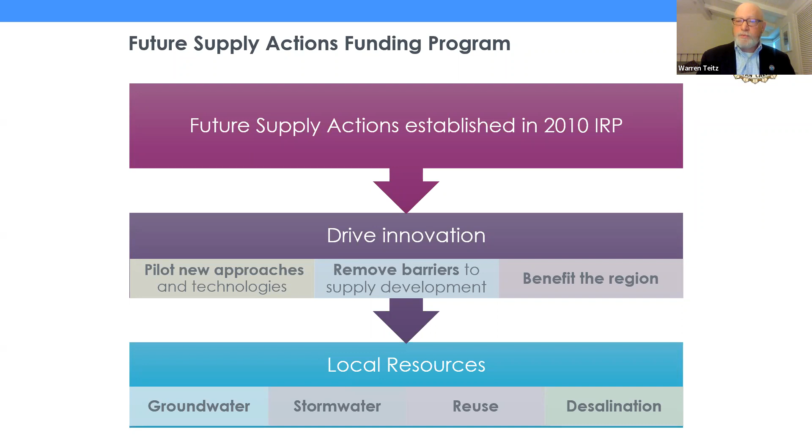Our current program includes 14 studies that we've partnered with our member agencies, totaling just over $3 million, and they cover all 4 of the resources. The presentations we're going to hear today both cover potable reuse. We also have 7 studies co-funded with the Water Research Foundation, including 6 potable reuse studies and 1 agricultural reuse study, just under $1 million. So the total program is about $4 million.

So I think we can go to the next slide, please. Our first presentation is from the folks from OCWD. They partnered with the City of Fullerton. Our first presenter is Dr. Megan Plumlee, the research director for the Orange County Water District. Joining her would be Dr. Julio Polanco, a postdoctoral research associate also with the Orange County Water District. At this point, Megan, I'll turn it over to you.

Thank you so much, Warren. Hopefully everybody can hear me and I got my camera on. All right, so the title of our presentation today is Demonstrating Virus Log Removal in Potable Reuse to Increase Regulatory Confidence. Hold on, let me minimize my thumbnail there. I can't see my own slides. Okay, there we go.

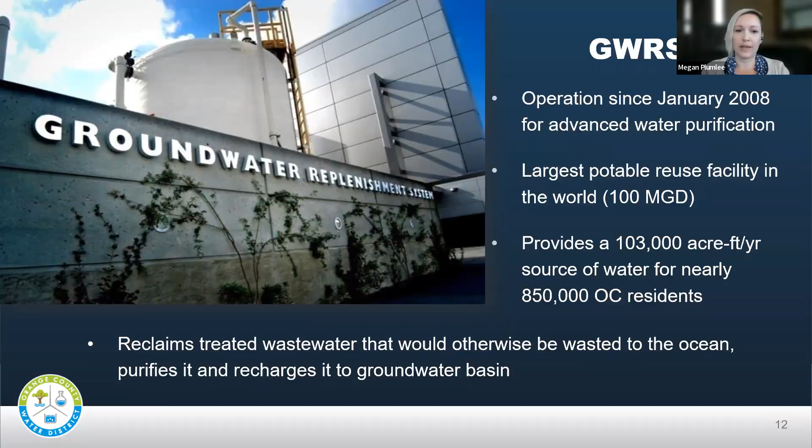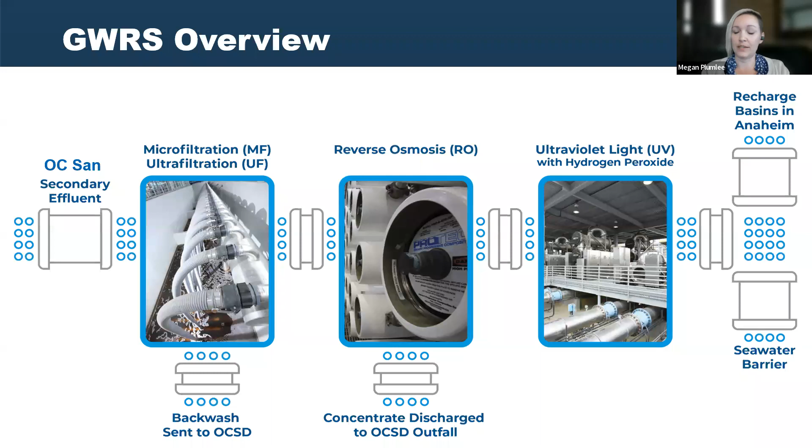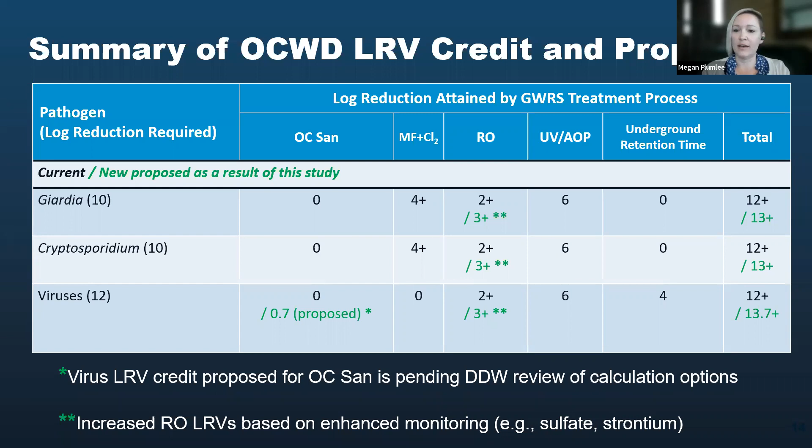So the green numbers show the outcomes of our study we're presenting today. Based on the results of this study, we're proposing to our regulator, Division of Drinking Water, a 0.7 log for the OC-SAN treatment process for virus, and then an extra log for the RO process. Both of these are being currently reviewed by DDW as part of our Title 22 engineering report for the final expansion of the plant. So still under review, but this is what we're proposing based on the study today.

So with that, I will turn it over to Julio, and he's going to present an overview of the results from our OC-SAN virus LRV study.

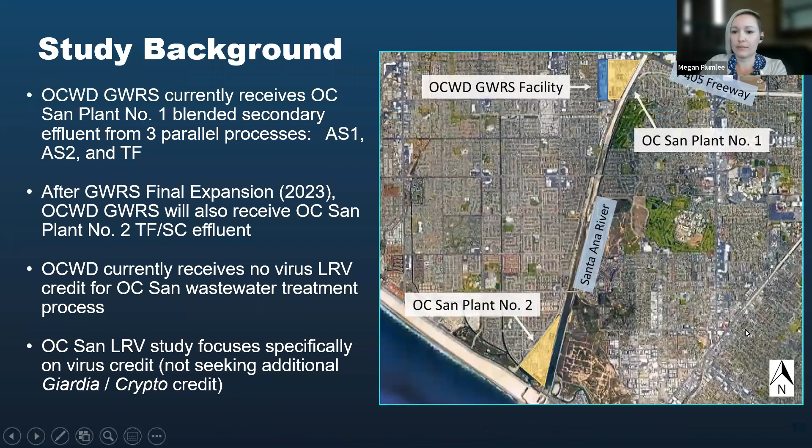As Megan mentioned previously, the Orange County Water District's groundwater replenishment system currently receives a blend of 3 parallel treatment processes from the Orange County Sanitation Plant number 1. These 3 parallel processes include 2 activated sludge processes, AS1 and AS2, and 1 trickling filter process.

The trickling filter process is a simple aerobic wastewater treatment process that removes organic material from the influent wastewater stream. The activated sludge processes are basically a nitrifying, denitrifying, partially denitrifying process that is more efficient at removing this organic material as well as some suspended solids.

So after the GWRS final expansion, which is scheduled to complete in 2023, the GWRS will also be receiving a 4th secondary effluent supply of water that is from the Orange County Sanitation District Plant number 2. That is about 4 miles south of the current GWRS facility, shown on the map right there.

This treatment process is a trickling filter trickling filter solids contactor, which is essentially very similar to the Plant 1 trickling filter, except it has an added step that allows it to remove an additional amount of suspended solids and has improved organic material removal.

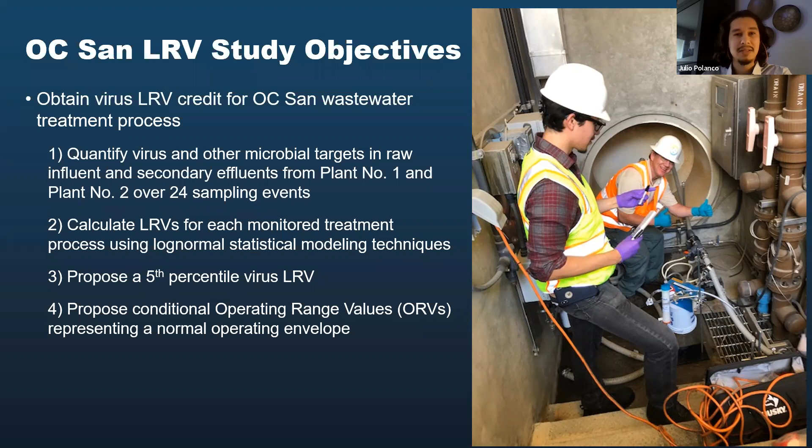Throughout this study, we monitored these viruses using a few standardized methods, including EPA 1615, for both the infectivity culture assay and the molecular assay. I'll refer to the infectivity culture assay as the cultivable virus data set going forward. For the molecular data set, we used droplet digital PCR as opposed to qPCR, which is within the modified 1615. We also used EPA 1602 to enumerate male-specific and somatic coliphage by cultivation methods, and standard methods 9222B and D to enumerate total coliform and fecal coliform.

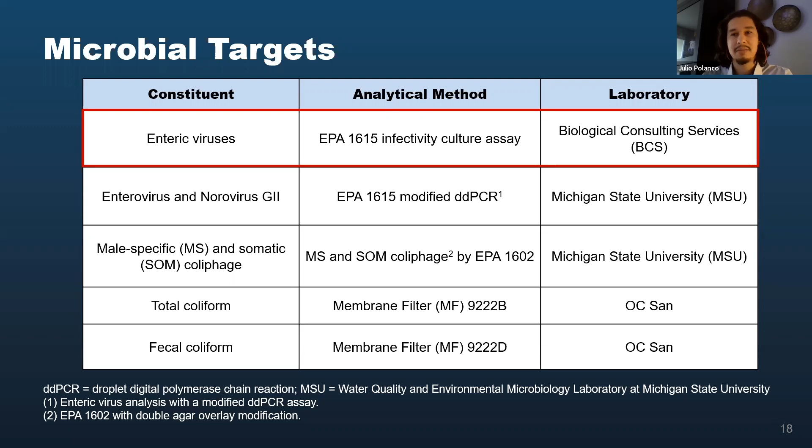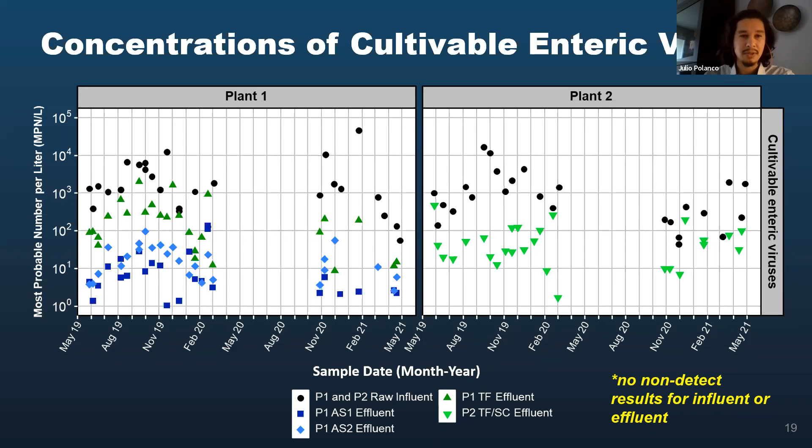One thing I wanted to mention is that we didn't observe any non-detect measurements for either the influent or the effluent, which is great because there are no substitutions going on. What's most important about this plot is that on every given day we sampled, the treatment processes show log reduction or removal of these viruses. Next slide, please.

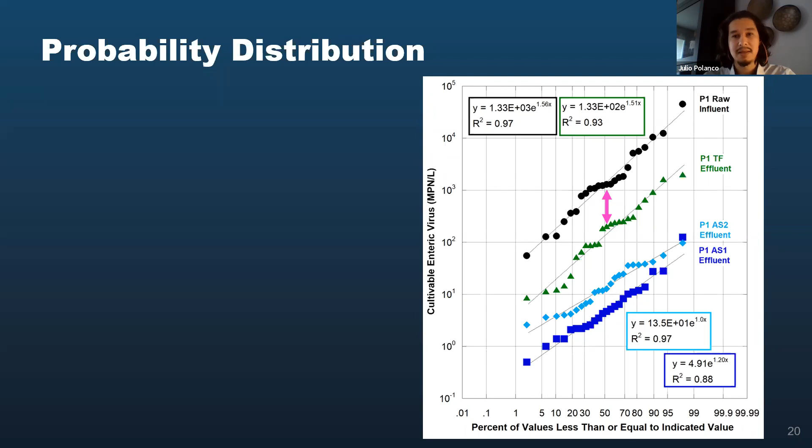Considering this visual representation of the removal of these viruses, how do we quantify it? We considered three different approaches for calculating log removal for each treatment process. The first approach was same-day pairing, which assumes the same water parcel is sampled from influent to effluent. Due to the complexities of residence times that vary between each treatment process, it's difficult to get an accurate estimate, and this is largely not valid, so we pushed this approach aside.

The second approach was the Monte Carlo approach, essentially a computer simulation that is an iterative log removal estimation based on influent and effluent statistical parameters. This means the two distributions in question, for example a raw influent data set and an effluent data set, are assumed to be independent. The third approach was a covariance approach, a parametric evaluation of influent and effluent distributions that tests the variance of two dependent populations. Based on review from our GWRS IAP independent advisory panel, it was recommended that we proceed with the covariance approach based on the quality of the data set.

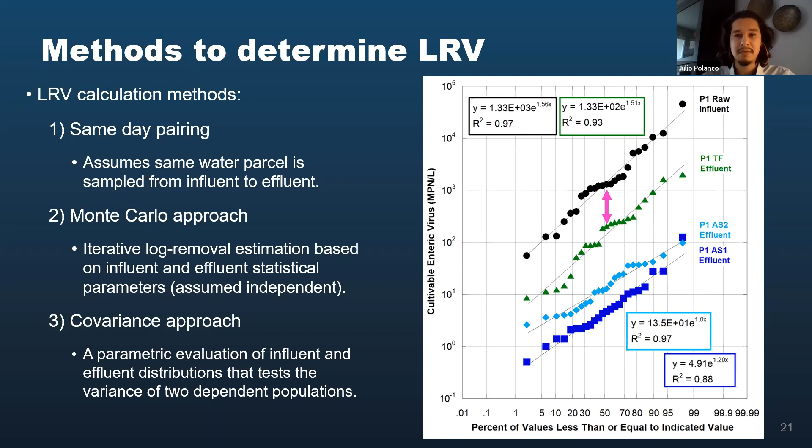The covariance approach was recommended since it assumes and tests the correlation between the log influent and log effluent values.

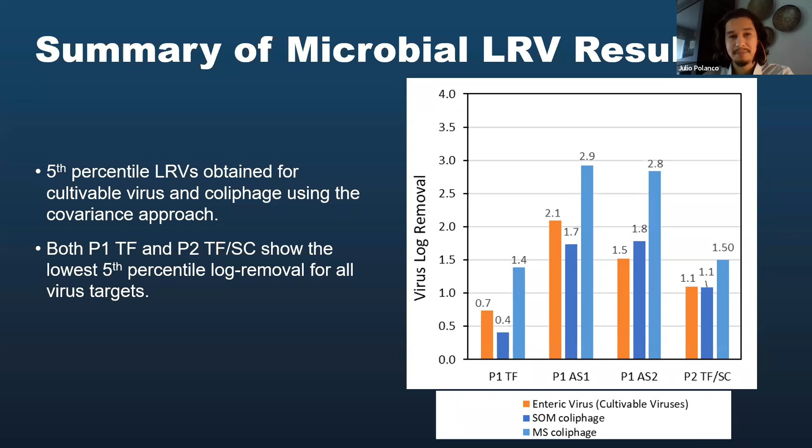To summarize the findings of this study, the covariance approach for determining virus log removal value credit was recommended by the GWRS Independent Advisory Panel. Due to the complexity of calculating a combined or amalgamated estimate of removal for all Orange County Sanitation District treatment processes, the 5th percentile value of the least effective treatment process, the plant 1 trickling filter, was chosen as a proposed credit value to represent a conservative value for all of the plant 1 and plant 2 processes.

This proposal is pending DDW review of the LRV calculation options. Currently, OCWD is proposing a log removal value for virus of 0.7 log, in addition to conditional operating range values for the plant 1 trickling filter, in the Title 22 engineering report.

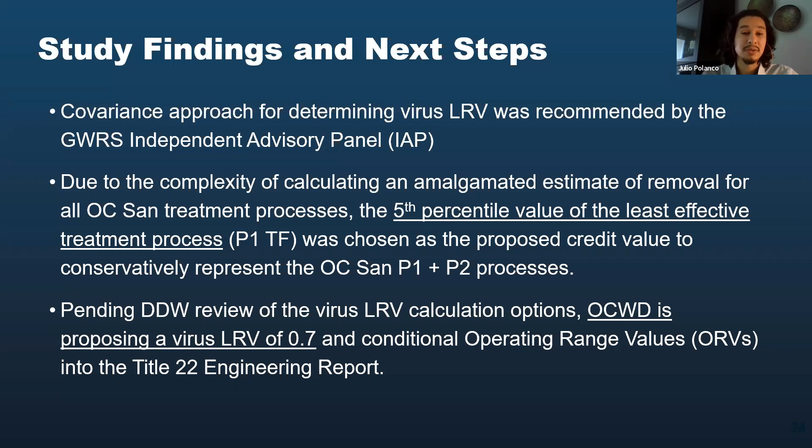All right, thanks, Julio. Okay, so for this portion of the study, let me minimize myself so I can actually see my slides.

There we go. For this portion of the study, focused on the RO process, quick reminder of the background: we currently achieve about 2 logs of virus log removal credit across RO, granted based on TOC, or total organic carbon, online monitoring. We have monitors on the RO feed and monitors on the RO permeate, and we simply calculate the daily average TOC percent removal, around 99%, or 2 logs, applied as the credit obtained that day for virus removal.

The objective of this study was to identify alternative constituents that could be easily monitored, either via online monitoring or grab sampling, that would show a higher log removal value than the TOC value of around 2. I should mention we also monitor electrical conductivity as a backup to TOC, which achieves around 1.5 logs removal.

We wanted to do this over multiple months to make sure we demonstrated values representative over time in different seasons, and we wanted to do this at full scale, utilizing one of the full scale RO units within the facility. That's a photograph there. Each of those distinct sections of white pressure vessels is a 5 MGD RO unit, and we currently have 21 of those in the facility.

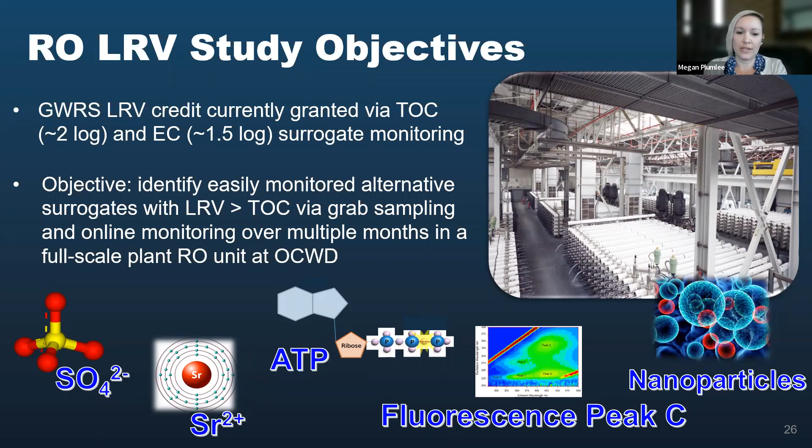For the other 4, we did see promising results in every case. This is a summary of our findings for the different constituents. Strontium showed the highest study average log removal value across RO, with a value above 3. Sulfate and free ATP were close to 3, also significantly greater than the TOC and electrical conductivity we monitored in the same full-scale RO unit at the same time. Fluorescence peak C showed the lowest log removal average value, but still a fair bit greater than TOC.

Strontium and sulfate were all measured via grab sampling. However, since we completed this study, online instrumentation has become available, and we're considering use of those. The free ATP and fluorescence peak C already have continuous or online monitors available, so that's what we used to collect the data for this study.

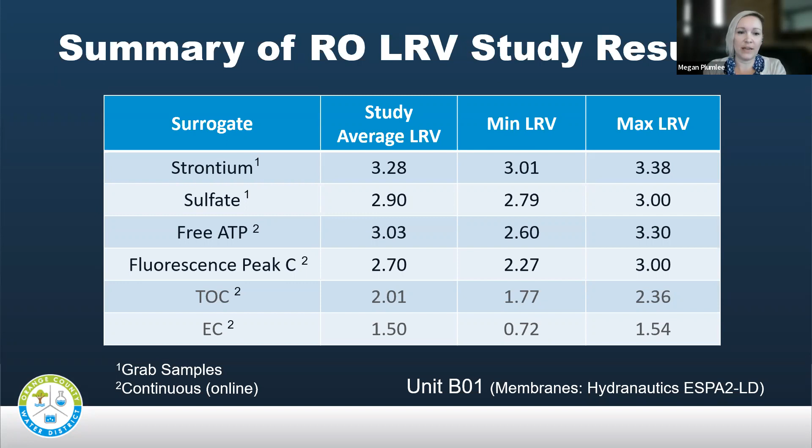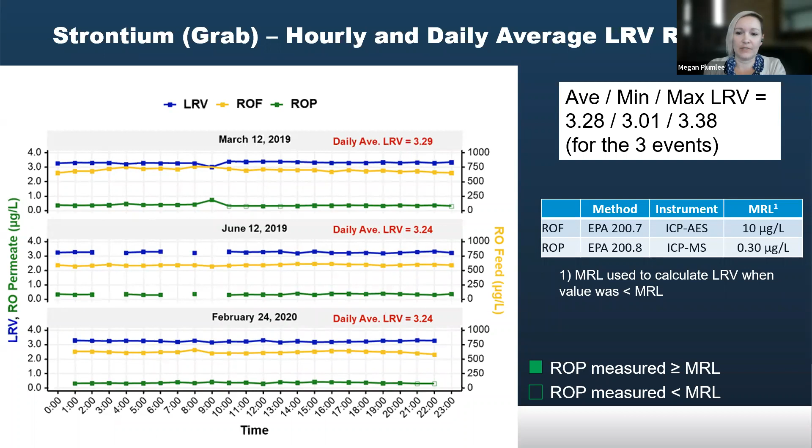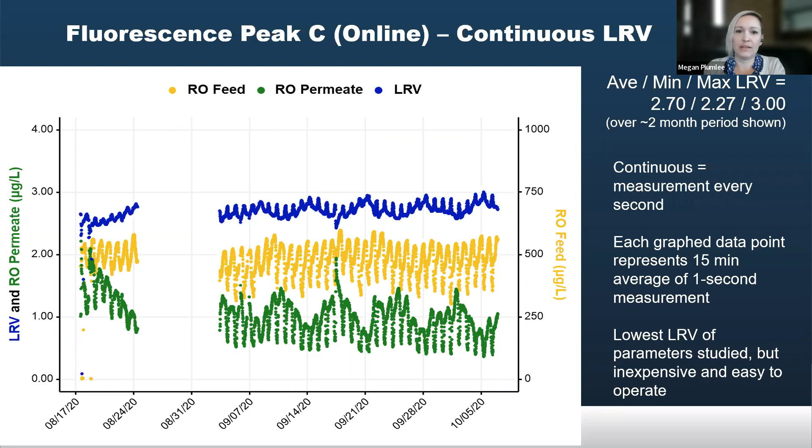So by far it was the easiest online constituent to measure and demonstrate log removal value, even less finicky than a TOC monitor for sure. So I think for a facility interested in perhaps a new facility coming online, interested in demonstrating integrity but not wanting the expense or complexity of online strontium, sulfate, or ATP, which are more costly, this could be a candidate to pay attention to.

So findings overall, we really saw that these novel online methods are becoming more feasible to enhance RO-LRV credit based directly on this project outcome.

OCWD is moving ahead, working with our regulator to propose a tiered framework. We couldn't pick just one, so we created a tiered framework based on strontium, sulfate, and ATP to be monitored in our facility as alternatives for demonstrating RO integrity related to our engineering report for expanding our facility and the permit there. We would still keep TOC and electrical conductivity monitoring as backup, because these provide other water quality monitoring value.

So it's really exciting to see how the findings from this study, not only for the RO portion here but also the wastewater portion that Julio presented, immediately translate into a direct application for our facility. And just want to note that though we are an indirect potable reuse facility, these findings are equally applicable to direct potable reuse facilities that will be required to demonstrate even higher pathogen log removal values.

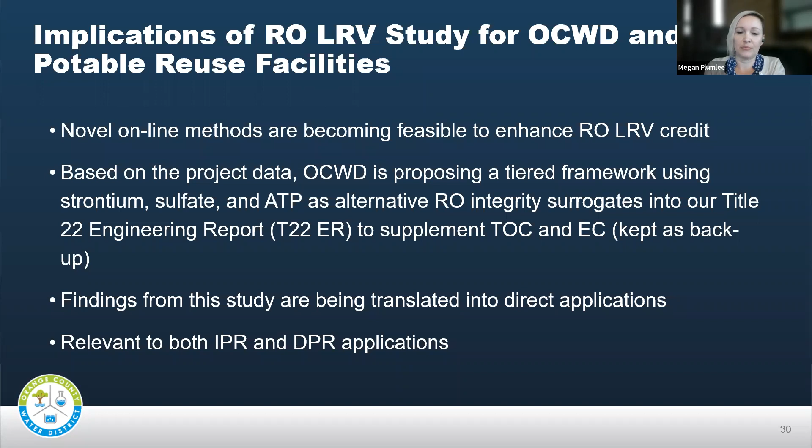So with that, if we have time, there may be some time for questions, or we'll move to the next presentation. Great, Julio, Megan, great presentations.

We have time for one question, and we actually have one question, so I think we'll answer this one live. This is from an anonymous attendee, and I think, Julio, this is directed for you. What would you estimate as the ballpark sampling cost for the wastewater treatment plant LRV study? So for basically the first part of the presentation.

It's a good question. It can get pretty expensive very quickly. For our study, we have some pretty large invoices, especially because we considered using molecular approaches. But on average, I would say we looked at about $500 cost per sample for the enteric virus analysis, the cultivable assay. If you're looking at a 24 sampling event for one treatment process, that translates to about $12,000 to do that assessment.

And regarding the coliphage and coliform, we were lucky enough to have the Orange County Sanitation District help us out with that, but we have about $100 cost for coliphage analysis for both targets.

I can jump in and add, we were just trying to put these costs together for a new Water Research Foundation project that's developing guidance for demonstrating pathogen LRVs across wastewater treatment plants. So I encourage you all to watch out for that one. The PI is Professor Verbyla, but I don't recall the number of the project. I believe he's pulling together costs from multiple projects, including ours, and the average is something like $200,000 to $300,000 in total to do a pathogen LRV study across. But I think that's including Giardia and crypto as well, whereas we just did the virus. So that's kind of a ballpark number.

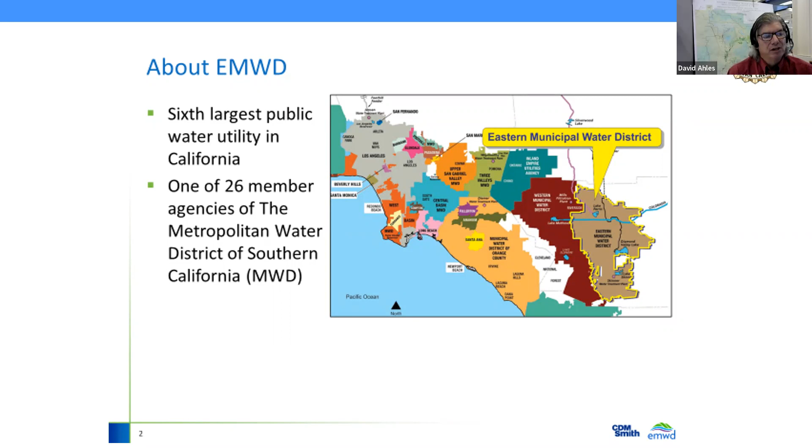Drive it. Okay, the name of our study was the EMWD Brine Minimization Pilot Study. And so what we did was we utilized CCRO, closed circuit reverse osmosis, to try to maximize recovery. But first, I'm going to talk a little bit about Eastern. Again, we are one of the member agencies of Metropolitan Water District. We cover the area from Moreno Valley down to the Temecula Valley, so the Inland Empire district, and we are the 6th largest utility in California.

We were established in 1950. We're full service: we do water, wastewater, and recycled water, both wholesale and retail.

Our population's growing quickly. We're at a little bit over 839,000, and our service area is large at 555 square miles. Really important is we're only 38% built out, so we have a lot of growth potential within our district.

Like everybody, we're trying to diversify our supply portfolio. So 30 years ago, you can see on the left, the majority of our water was imported from Metropolitan, both through the State Water Project and the Colorado River Aqueduct. We're fortunate we have a large potable water aquifer that supplies drinking water, and that was about 18% 30 years ago.

We've had a recycled water program for a long time. Moving to today, we pump less potable groundwater as a percentage, but we've instituted a new program pumping the brackish basins. On the west side of the district, the groundwater aquifers are brackish, so we have about 8 million gallons a day in desalter capacity, and those desalter plants are hooked up to the inland brine line. We continue to expand our recycled water program to the point where, on average, all the wastewater is treated to Title 22 standards, disinfected, and then used for non-potable sources.

The district has created a program called Groundwater Reliability Plus, and it has 7 sub-projects to it. Today I'm just going to talk about the top 3 shown here, and these are groundwater recharge projects.

The first one, groundwater sustainability, is our current groundwater recharge that we do with imported water from the State via Metropolitan. We have an agreement with both Met and the Soboba Indian tribe to recharge on average 7,500 acre feet a year, and we do that in existing recharge basins in the San Jacinto River.

The middle project is our water banking. This is a new initiative where we'll bring in more imported water and increase the amount of recharge that we do. We just finished construction on what we call Mountain Avenue West Recharge Basin, a basin with a capacity infiltration rate of about 30,000 acre feet a year, so we'll be bringing in more imported water.

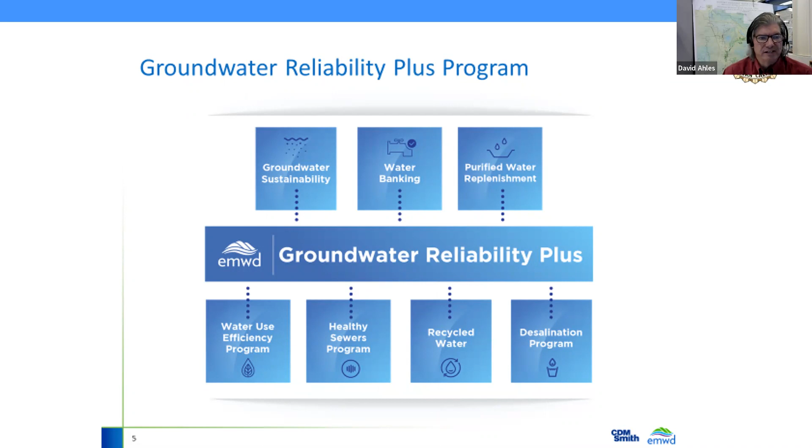We're currently working with Met for a new connection and a new 60-inch pipeline to bring in additional recharge water, up to 14,000 acre feet a year. On the right is our indirect potable project, or groundwater augmentation project, which we're titling the Purified Water Replenishment Project. This is a new potable reuse project that will take the treated wastewater and recharge it into the San Jacinto Upper Pressure Zone basin.

A little more detail on our groundwater augmentation project: all the flow comes from our San Jacinto Regional Water Reclamation Facility. We'll start with the disinfected tertiary water, which will have two streams. The main stream will come through an MF-RO system, and then it will be sent out to the recharge pond.

The reason for this treatment is the groundwater basin has a maximum benefit objective. To comply with the basin plan, our recycled water is currently about 600 TDS, and the maximum benefit objective is 500 TDS, while the current water in the aquifer is probably around 400 TDS. So we want to recharge water that is higher quality than what's already in the existing groundwater there.

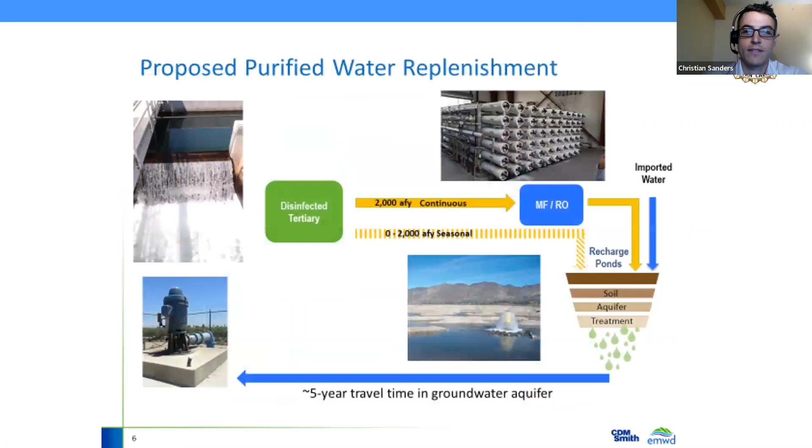Okay, so thank you. We just wanted to start off first with a brief introduction to the pilot. The goal of this pilot was to look at how high a recovery we could achieve with the process, and again, being an inland location, brine disposal is a major cost and project driver for this project.

The preliminary design was done a few years ago by CDM Smith. A traditional 3-stage RO was proposed at the time based on 92.8% recovery, and the objective of this pilot was to look and see whether or not we could push that recovery up a little bit higher using the CCRO process.

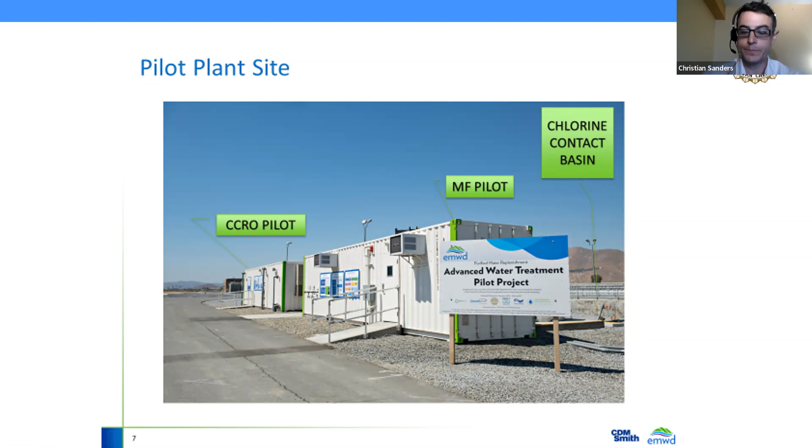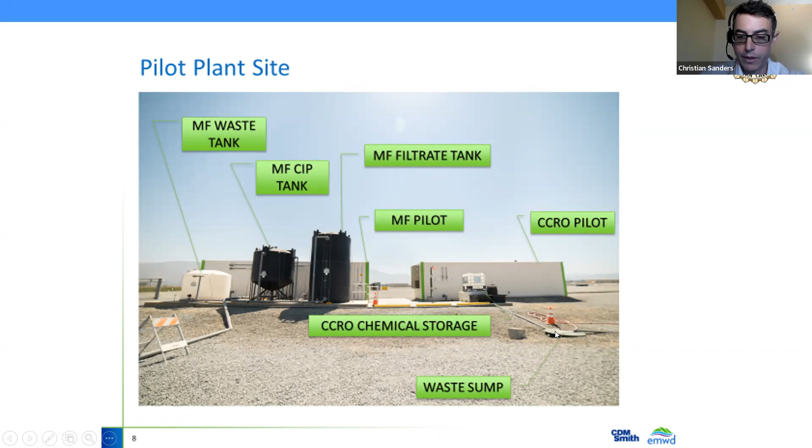Another photo for the backside - we've got our CCRO pilot here on the right-hand side and the MF pilot on the left. This MF filtrate tank was our balance tank between the two pilots. We produced filtrate, which was used for backwash in the MF and was the feed water supply for the CCRO. The CCRO's chemicals were located outdoors, but the MF's chemicals were located inside the trailer. All the product water we produced, the brine and everything else, was returned back to the chlorine contact basins via this waste sump here.

A quick schematic for those on the webinar not familiar with CCRO: it looks similar to RO, but the main difference is this circulation pump and the brine flush valve. During the closed circuit cycle, we're producing permeate as a normal RO, but we're also recirculating brine, and in that process the recovery is slowly increasing over time during the closed circuit cycle.

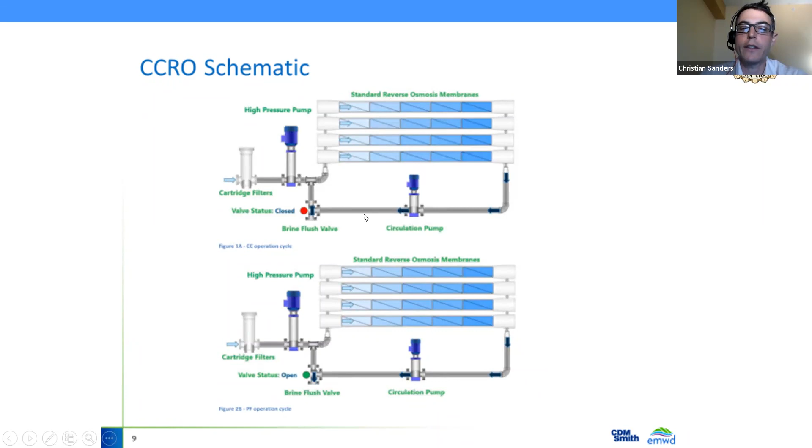Once you hit your recovery value - in this case we started the pilot study at 90% and were trying to push it up to as high as 95% - when you get to that recovery set point, the brine flush valve opens and the circulation pump sends concentrate to waste. It's during that plug flow cycle that the CCRO functions as a typical RO. During both cycles, the permeate flow remains unchanged; it's the concentrate flow that's either purged during a plug flow cycle or recycled during the closed circuit cycle. That concentration cycle is really unique to CCRO.

In the interest of time, we won't dwell too much on the MF. The study didn't really focus on the MF, but we thought it'd be important to present some of the key design parameters. We used Toray TIPS membranes, 200 micron auto strainers upstream, and we had the ability to dose sodium hypochlorite, liquid ammonium sulfate, and sodium bisulfite, varying those depending on changes in feed water quality.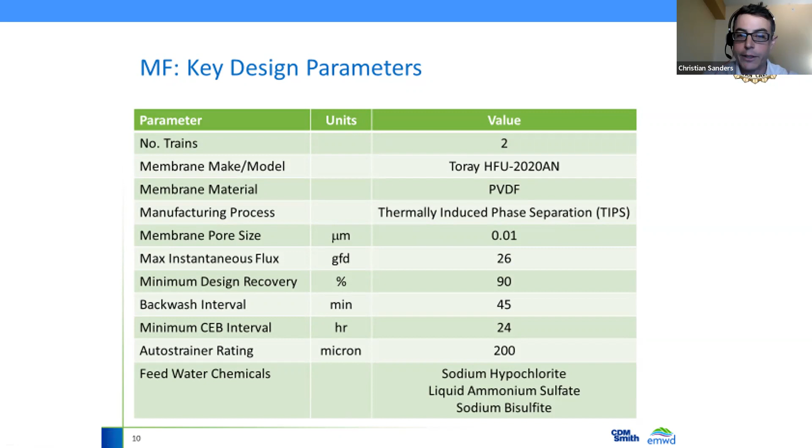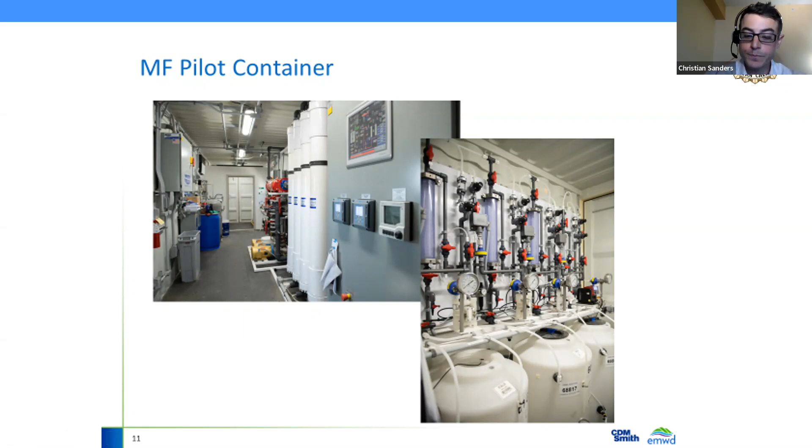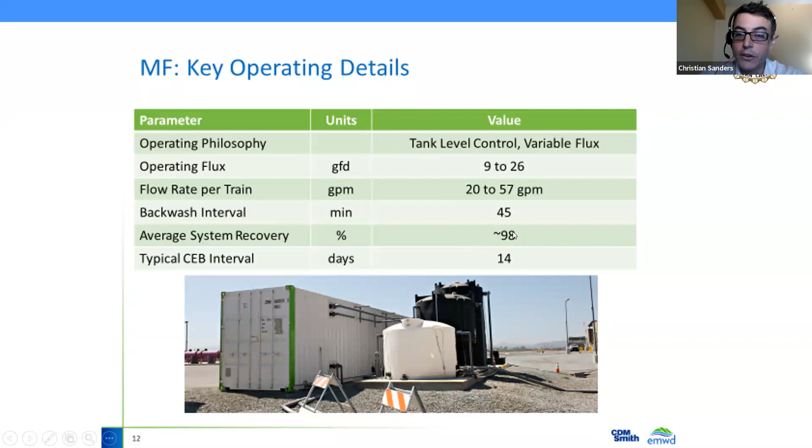So we started with a backwash interval of 45 minutes. We didn't change it at all throughout the pilot study, which was about 7 months long. On average, we were doing a chemical enhanced backwash approximately every 14 days, which is quite a lot of time between chemical enhanced backwashes. We started off with about 1 week in between, and we found we were getting very little decrease in permeability, so we stretched it out to 14 days, and in general this was sufficient. As you can see, that resulted in an overall system recovery for this process of about 98%.

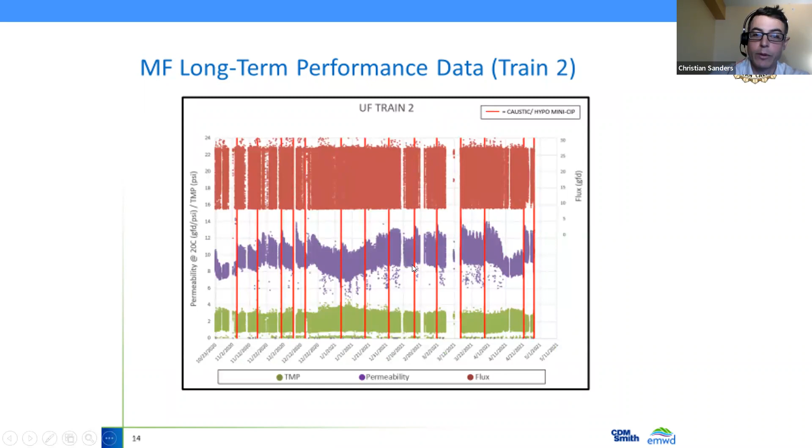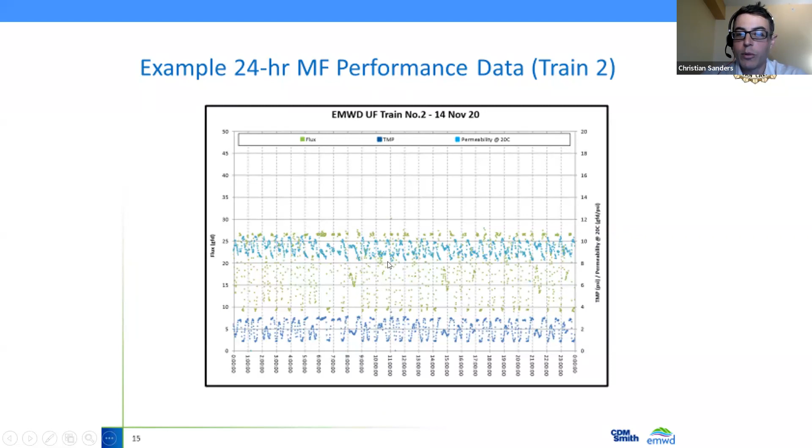Just to show what we talk about when we say stable performance - this turquoise line here is our permeability. Very little change from start to finish over a 24-hour period, and this would go on for days. TMP roughly between 1 and 3 PSI, more or less, on average over a 24-hour period. Our green dots here are the flux. Again, because it's variable, it's a little scatter shot on the screen.

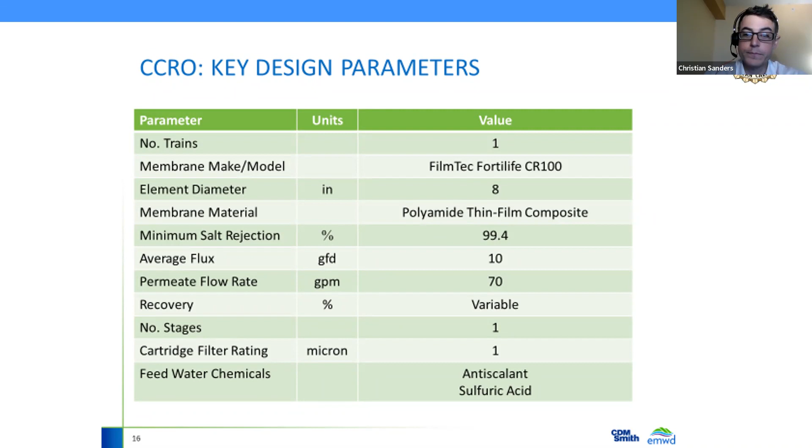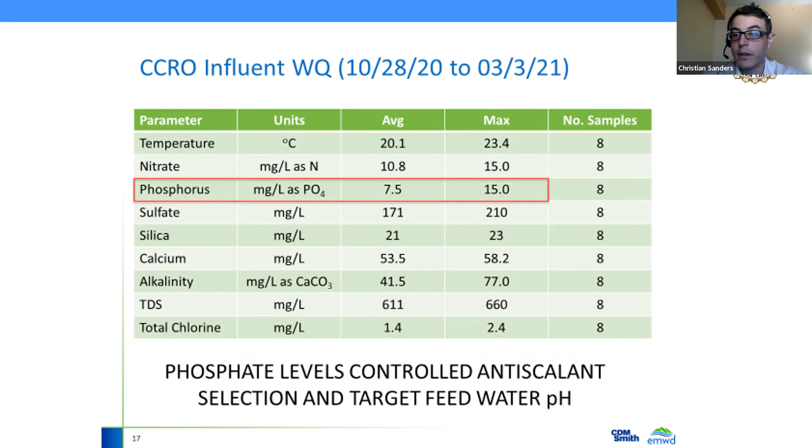Some of our water quality constituents - we've got a red box around our phosphorus because that was the driver behind our anti-scalant selection and dose rate. This is also the driver behind our pH set point, calcium phosphate scale being the main concern we had.

We did start with an Avista product. Ultimately, about halfway through the pilot study, we went to AWC. We found that their projection software was more robust for CCRO. It's the only one that we're aware of that actually has a CCRO specific functionality to their projections. We were also able to do bench testing at their labs in Florida to confirm the findings from the projection software. It just gave us a lot more confidence in what we were using.

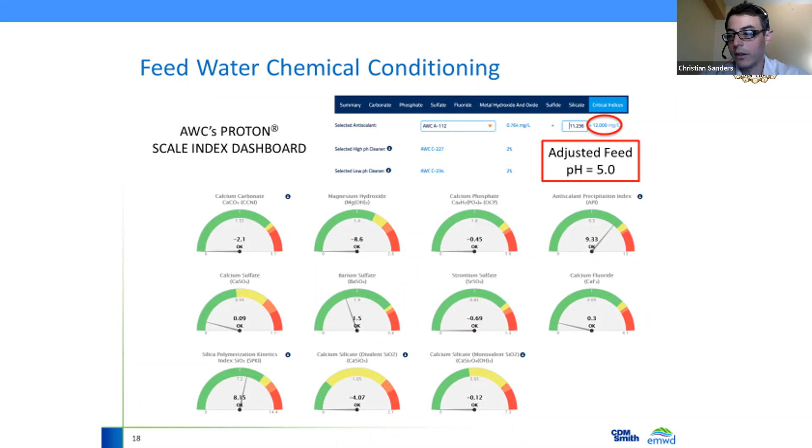So we settled on a dose of 12 milligrams per liter and a pH of 5 based on those worst case conditions. We only identified the worst case condition at the start of the pilot, but again, we were really concerned about having some uncontrolled scaling occur. So we based all of our chemical dosing set points on worst case to make sure that any fouling that was happening was simply reversible fouling and not irreversible.

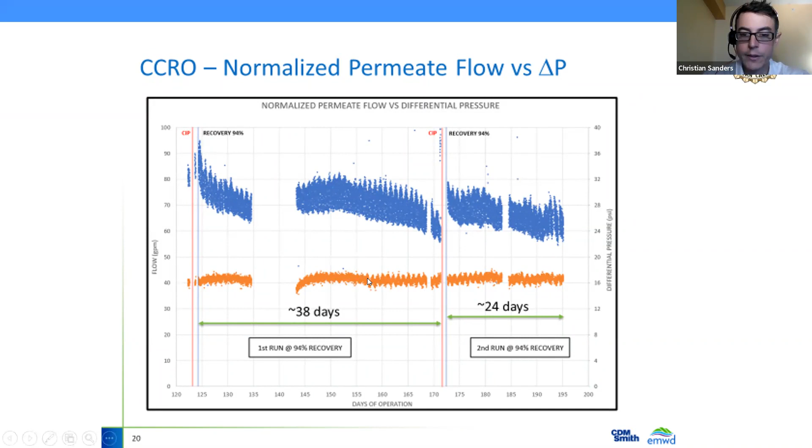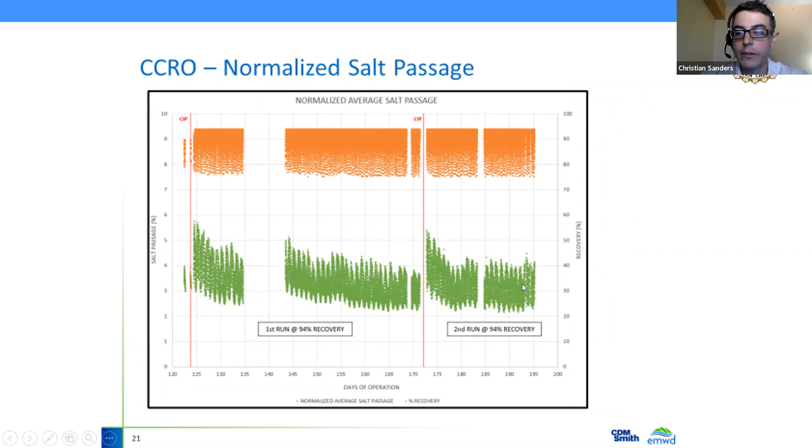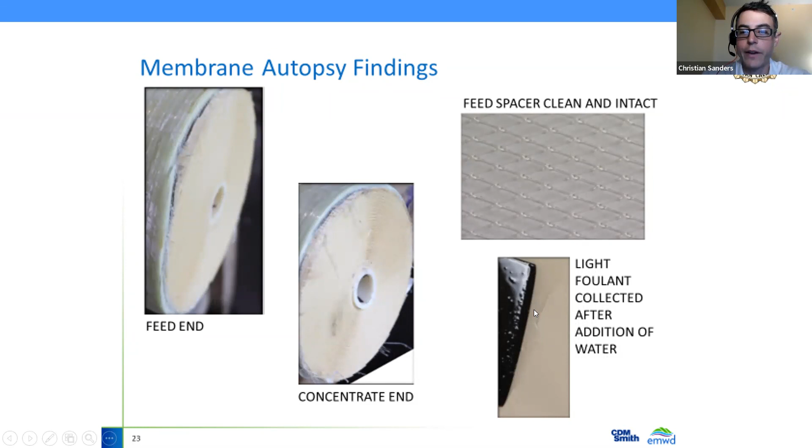They did find a light foulant. I'll go back to that slide here. So their conclusion, everything was looking very visually good upon arrival. It didn't weigh very much compared to a brand new membrane, so it hadn't accumulated a lot of material.

When they went to do their standard CIP procedures, which typically they perform a generic CIP and then they start to get into more specialty cleans to figure out what's the foulant, what they found was just soaking a coupon in deionized water in preparation for the CIP, they got a 20% boost in permeability over the membrane's nominal specification. They then got another fairly significant increase in the permeability after just doing a generic high pH clean. They then did the typical acid clean after that. There was a slight change, but not too drastic in that permeability.

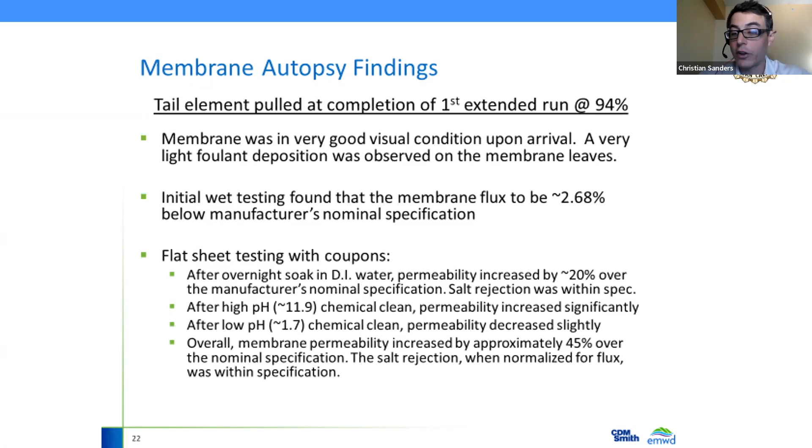Overall, there had been an increase in what they calculated approximately 45% increase over the membrane's nominal specification, which was very interesting. They looked at salt rejection as well, and when they normalized that for flux, it was within specification.

So that large increase in permeability was not associated with oxidative damage, and because the Fujiwara test came back negative, and the salt rejection, as I noted, was within the specification, they didn't find any evidence of inorganic fouling, which is what we were mainly concerned about, especially with the risk of calcium phosphate scaling occurring here.

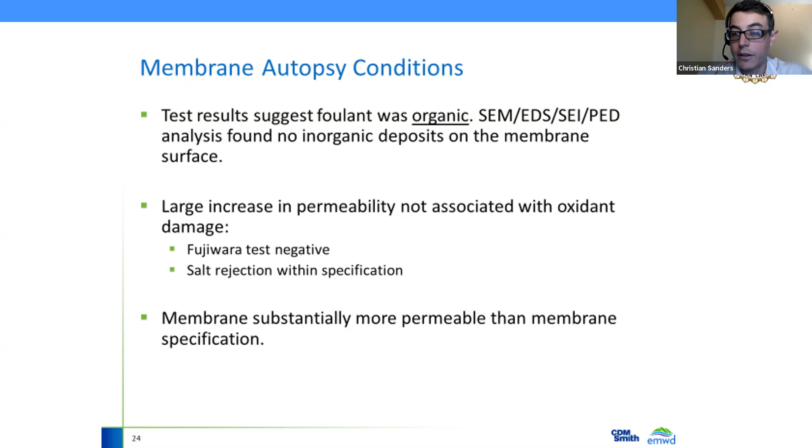And so the foulant actually was determined to be organic in nature. They didn't provide much more information beyond that, but that simply was the only thing that could really be understood by the autopsy results. They did conclude that the membrane was substantially more permeable than the membrane specification, which was simply an interesting fact that they uncovered. They did tell me that they've identified that from time to time, and the end conclusion was that we simply had something organic that we needed to focus on for the future.

Now, we didn't get these results back until the end of our pilot study, so we really haven't had any ability to take any action on these results. It's simply information that came back at the end.

So we did perform a cost analysis to look at what would a CCRO facility cost versus a conventional 3-stage for this pure water replenishment project, which is initially going to produce 2,000 acre feet per year based on 90% availability. The preliminary design that CDM Smith completed in 2018 assumed an average flux for the system of 12 GFD and a brine flow of 108 GPM.

So if we could bring the recovery up to 94% with CCRO, we could bring the brine flow down to 89 GPM, and a 20% reduction in brine flow is fairly significant on a project like this.

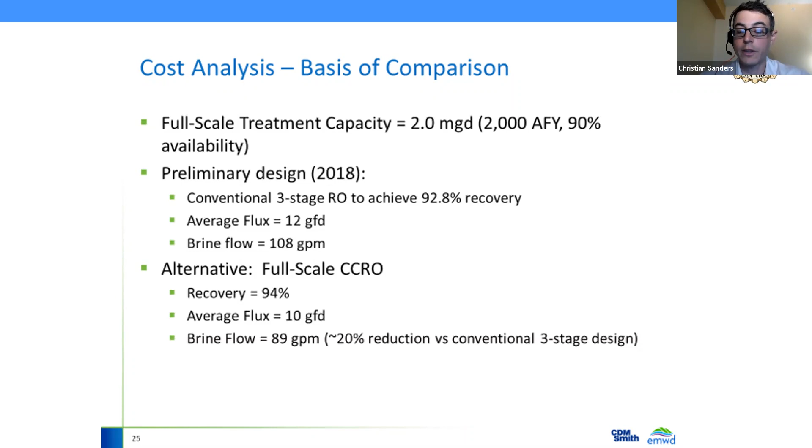So some of the things we assumed when we did this basic cost analysis: we were only going to look at the CCRO and 3-stage RO equipment, chemical conditioning, and brine ponds. We were going to assume that all other project components were identical, and that labor costs were going to be equal. For the operating costs, we included power, chemicals, membrane replacements based on a 5-year average membrane life, and we assumed a flat 2% of equipment cost for maintenance.

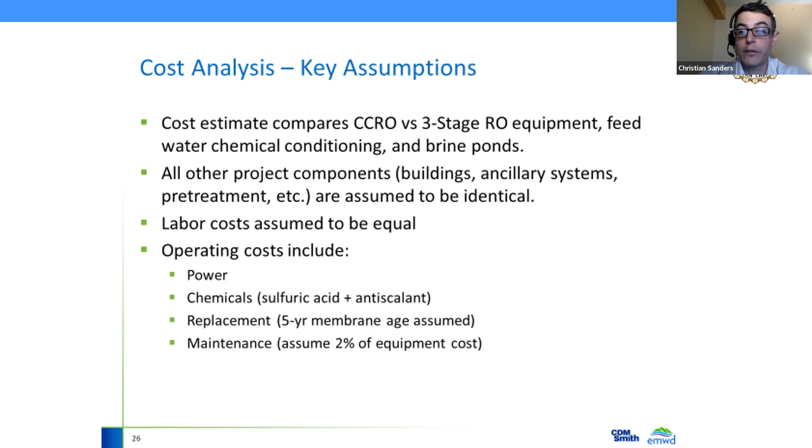Now for that CapEx, we assumed there would be two 2-MGD trains, and that was to have redundancy in the RO for the 3-stage RO option. We costed that at $2.4 million. And for the CCRO, we assumed 3 1-MGD trains.

After talking with Desalitech, they thought the 1-MGD train was the most cost-effective for this project. So we based our assumptions on assuming that there would be 1 redundant 1-MGD train. That came out to a cost of $2.7 million, so a little bit higher than the 3-stage RO.

Now, we did cost the brine ponds in the preliminary designs. That came out to 9.2. So we escalated that to 2021 numbers, assuming 5% escalation, which, as everybody knows in this current environment, may or may not be exactly accurate, but is more or less in the ballpark.

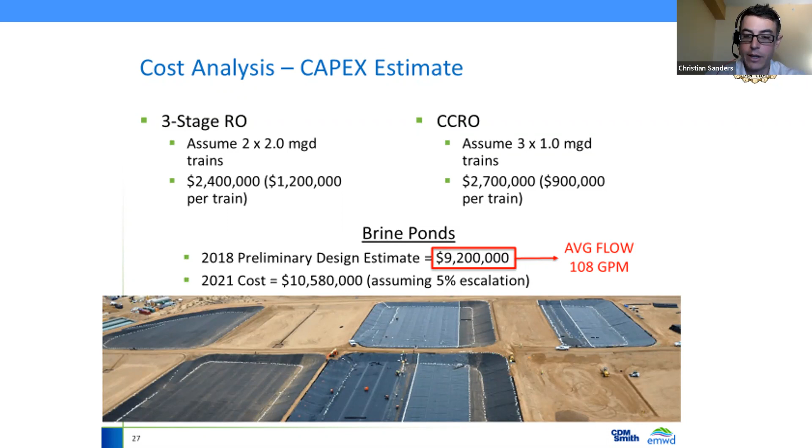We came up with 10.6 million for those ponds. Remember that number of 108 GPM. When we did the NPV estimate for a 30-year NPV, we assumed smaller capital costs for the evaporation ponds related with the CCRO, and we basically just took a proportional reduction. So we used 89 over 108 to come up with the value of 8.7 million for the ponds for a CCRO process.

For annual O&M, again, as I noted, those are based on the chemical and power costs and an average membrane life replacement every 5 years. The cost is considerably higher for the CCRO because we were basing that on the numbers we used during the pilot, which were very conservative. We certainly would expect that number to come down if we were experiencing a degree of optimization and average conditions.

This number came out to be $442 per acre foot for the 3-stage RO and $467 for the CCRO. We definitely would expect it to be less daylight between those two numbers based on a less conservative regime of chemical dosing for the CCRO.

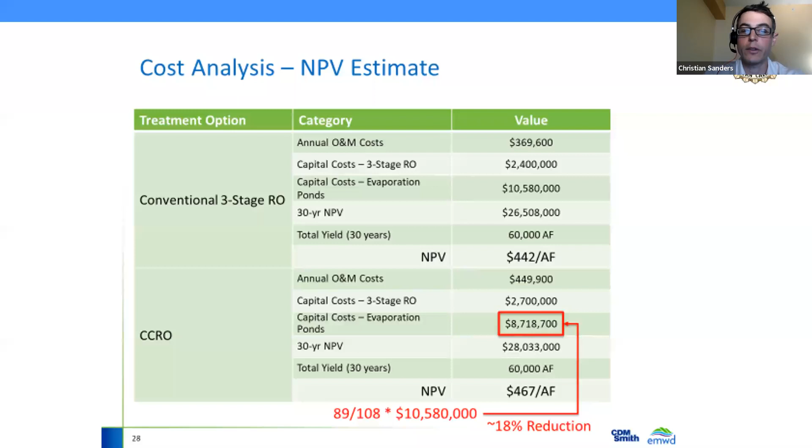Some of the potential enhancement opportunities: during the pilot, everything was based on worst case conditions for phosphate, 15 milligrams per liter. We would definitely assume there would be some significant savings based on a more average set of conditions. To achieve that, you would need monitoring in place to make adjustments based on changes - having phosphate analysis happening upstream, online analyzers located downstream of your tertiary filters in the case of the district's treatment process, and making sure the anti-scalant dosing was based on 7.5 or somewhere in that neighborhood would make a significant reduction in the cost of anti-scalant, which is very significant on these projects.

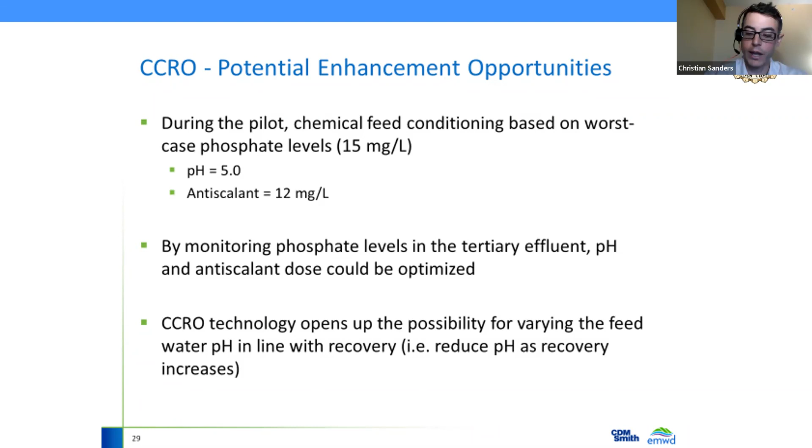CCRO technology opens up a lot of potential in terms of its ability to vary chemical dosing based on the recovery. We didn't explore that during this pilot study, but there's definitely some intriguing opportunities in the future for looking at changes in the code to adjust chemical dosing as recovery increases over time. During the first 30 to 50% of a CCD cycle, there's really no need for any pH adjustment, so that opens up a lot of possibilities - certainly something we didn't do, but would be very intriguing to look at in future CCRO piloting studies.

To end with some observations and conclusions: as we noted, the MF operating parameters were very conservative, and as a result we got very reliable performance out of that system, which was very nice and allowed us to fully focus on the CCRO.

The CCRO showed extremely similar operating stability compared with a 3-stage process in the typical band where we'd expect 3-stage RO to be operating on a feed water of this type, 92 to 93% recovery. We pushed it and could get up to 94% recovery, assuming a 30-day interval between CIPs, which is a standard industry benchmark.

We were being very conservative in how we triggered those CIPs. We were looking for no greater loss than about 15% in the normalized permeate flow, but we acknowledge many applications can go much harder than that - we say 20 to 25%, but up to 50% is not unheard of. If we had more time in our piloting study, we could have maybe taken those losses much higher if there wasn't as much risk of irreversible fouling affecting what we could achieve in our 6 to 7 month piloting window.

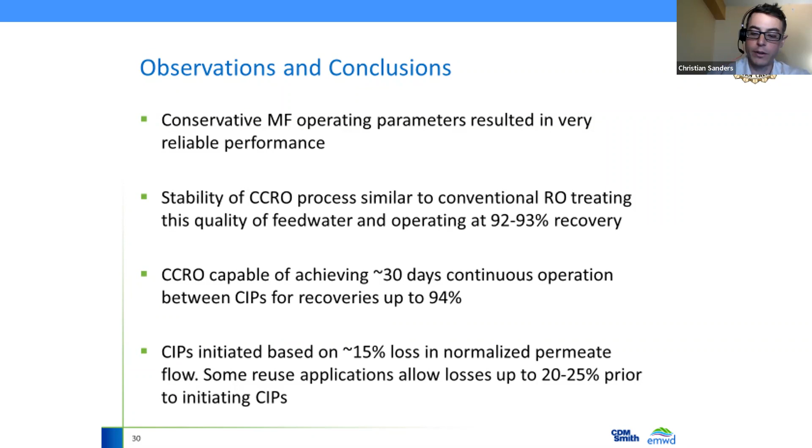Reliable pH monitoring and control is critical, especially when you've got phosphate in your feed water. Redundant instrumentation for something like a pH probe would be highly recommended. The membrane autopsy was pointing towards organic fouling, which in the future would definitely suggest there needs to be more attention to the chloramine residual through the system, making sure you're doing analysis on the feed water constituents to get a better understanding of what that organic material is.

The 30-year NPV for the conventional 3-stage was less than the 30-year NPV for CCRO, even when you consider there would be smaller ponds. But again, as noted, the daylight between those two NPV values would certainly come down - with a degree of optimization, we certainly think it could become much closer.